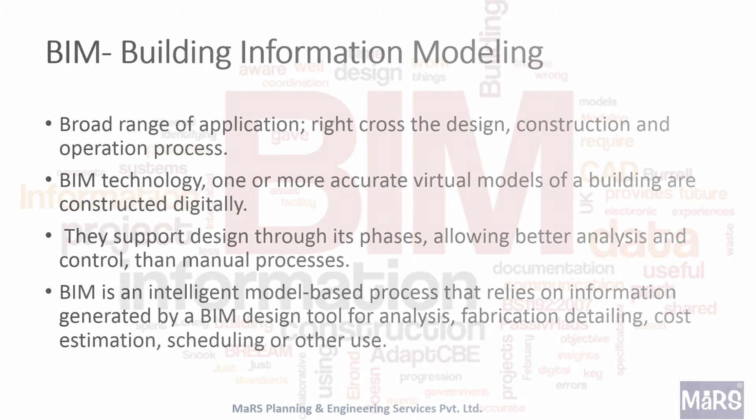MaRS BIM and other services. MaRS Group has been working in sectors like buildings and industries, water and wastewater, roads and transport, urban and regional planning, material testing and investigation. We provide services like survey and soil investigation, architectural and structural design, tendering and third-party inspection, construction supervision consultancy, project management consultancy, material inspection.

In year 2012, we came up with the idea of BIM, Building Information Modeling, and developed a separate department for BIM services. In BIM we offer services like 3D modeling support, coordinated construction support, facility management, BIM implementation and 4D simulation services.

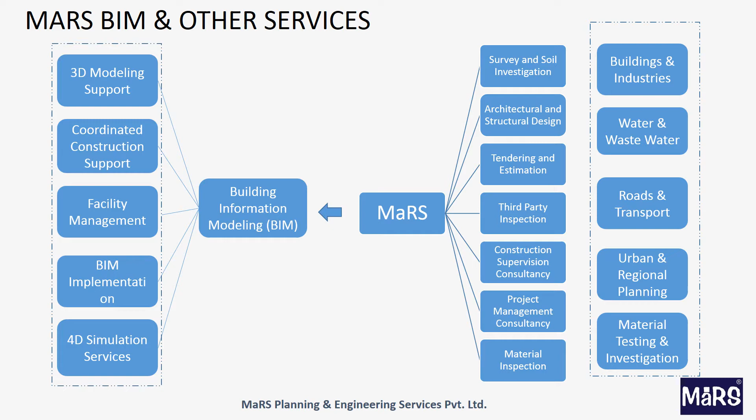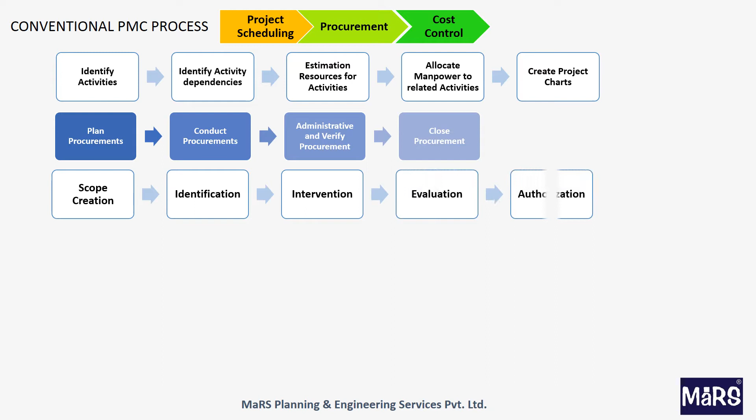Conventional PMC process: project management is a continuous process which needs to be efficiently carried out to achieve optimum use of cost, time and resources. There are 6 verticals of project management which start with project scheduling, procurement, cost control, document management, field management and data collection.

Depending on speculated life cycle of the project, budget and availability of resources, a master schedule of the project is prepared. It is important to specify milestones in project execution along with the tasks involved. All tasks have flow of work and interdependencies with specific quantum of time and resources noted in the master schedule. Such master schedules need to be updated daily to manage project activities.

It gives early alarms for delays, procurement, etc. Timely procurements need to be carried out knowing the time to delivery. The master schedule is rechecked for its correctness.

Quality assurance and quality control are two major supports of the project, fixed up time to time throughout the project duration. It ensures safety and quality of a project.

Along with QA and QC, it is essential to maintain field records like cement register, steel register, labor record book, etc. Maintained data with results and reports need to be shared with the client to make them aware of the project management affairs.

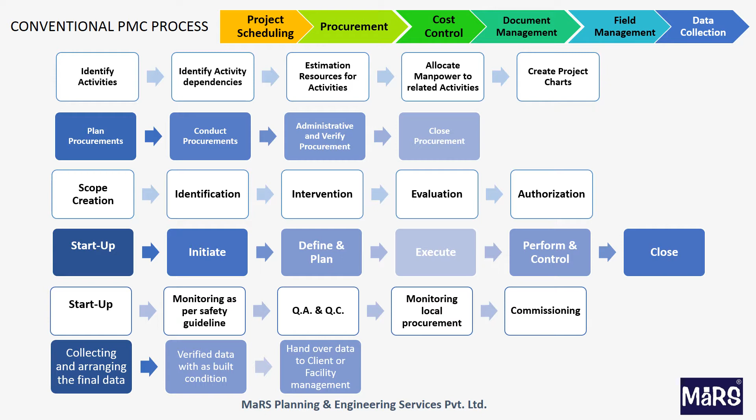BIM-based PMC process: virtual design construction. In this process, first we receive all the 90% design data from the consultant or client. Then we start the basic modeling in reference to the received data. This process is similar to virtual construction.

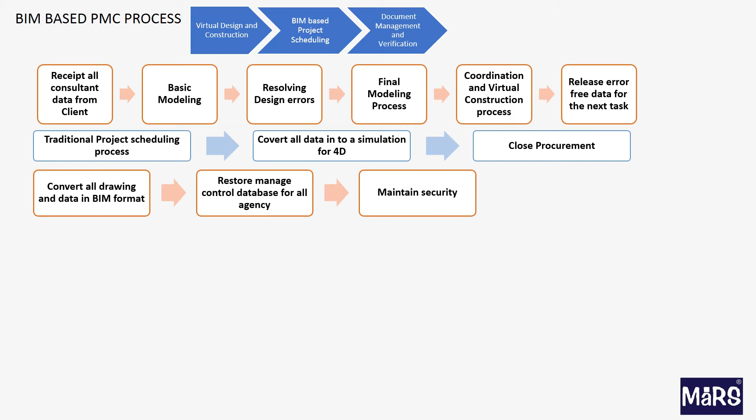At the same time, we find the design errors and conflicts. With the help of the consultant team, we sort it out. After this process, our construction data becomes more specific and accurate. Based on this data, we start the virtual construction process.

BIM-based project scheduling. For this task, our initial process is the same as the traditional project planning stage. We revise our model as per the project plan. The model can assign the phases of construction, which is helpful to us in 4D modeling.

After the completion of this process, the planner is able to prepare a 4D model, which will be ready for on-site weekly updates. This 4D model can compare actual versus planned progress.

Document management and verification. For better document management, we update all the data in one format. So all data will be available in a single model, and this data is placed on a cloud-based server. This facility can be managed for easy accessibility, security, and improved review cycle.

So all appointed agencies can review their requirements. The verification process will improve, and the execution team will get final and accurate data.

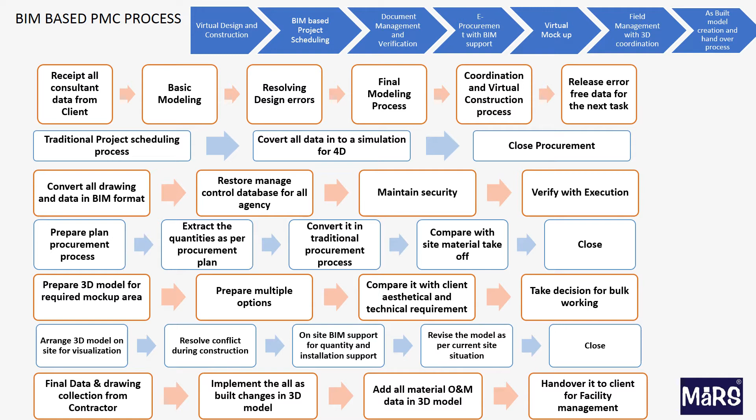Also, they can find the revised quantities and remaining changes in the further process. This way, the design and PMC team will get final and accurate as-built drawings from the model.

As-built model creation and handover process. This task is very important for the building life cycle. The team collects all the as-built data from the different agencies and converts it into one single model.

This model will help in the operation and maintenance process. So this model is handed over to the client or facility management agency.

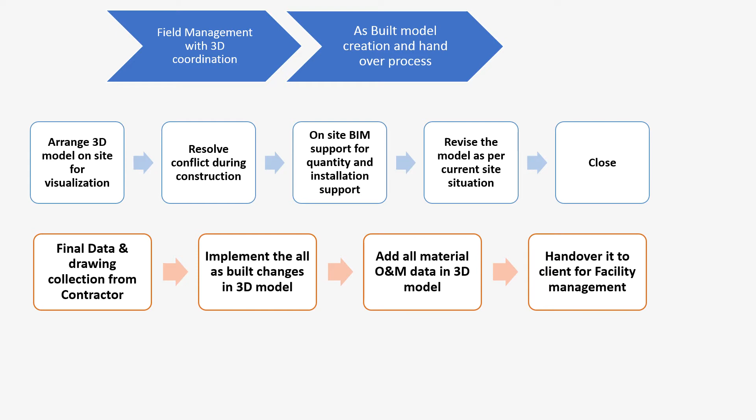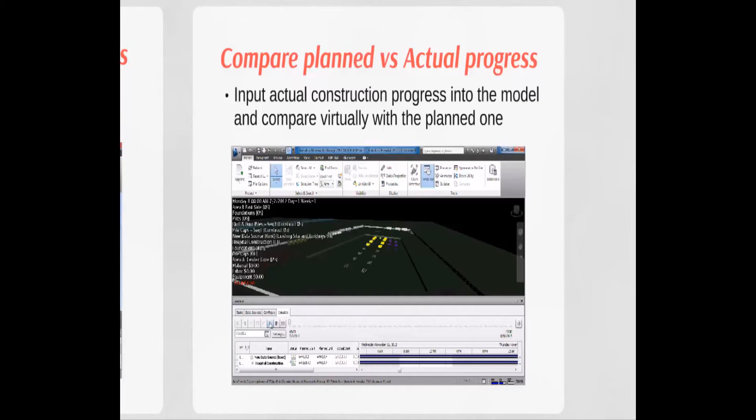Planned versus actual progress. The video shows how 4D simulation can relate actual progress and planned progress of construction, and we can manage to see the progress delays and differences.

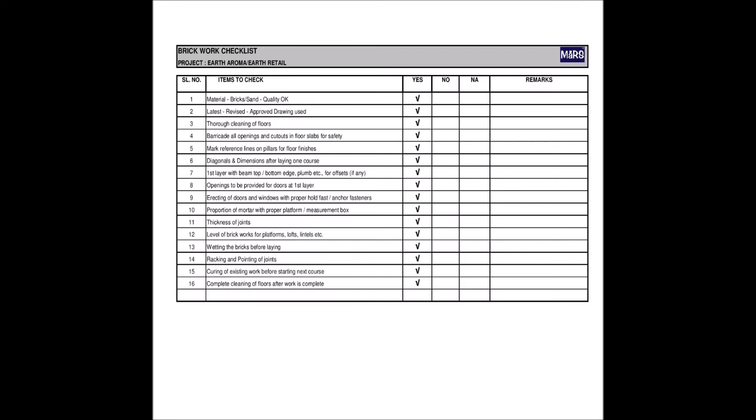Specific requirements for BIM-based PMC: we require 90% design data, 90% project requirement time, and budgetary data is also required for BIM-based PMC. The requirement of site-based BIM support and cloud-based data management is also mandatory.

Good for construction drawings, technical specifications and quantity takeoffs are done and released from the 3D model. This data is shared with the contractor for on-site working.

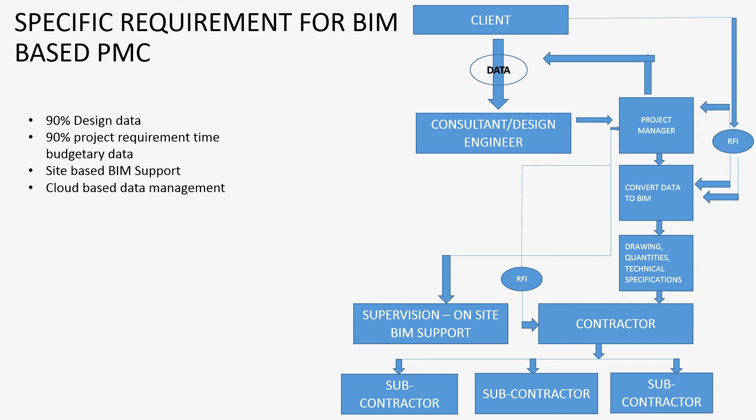Benefits: the basic benefits of BIM are a collaborative work environment with a single and common place to collect, store, share and manage the model; faster project delivery; reduced cost due to consistent data capture and reporting; reduced risk with tools to identify and resolve issues; increased transparency and visibility across stakeholders; and easy client handover at the end of the project.

Virtual design and construction phase benefits are: raised accuracy in design, minimized design revisions, minimized design-based delay in design approval, and improved approval cycle.

BIM-based project scheduling benefits are: 3-dimensional visualization in project scheduling, managing multiple sites from a single location at one time, easy and fast actual versus planning comparison, resolving conflict between tasks, avoiding delay, and document management and verification. Benefits also include improved review and approval cycle, easy data sharing, minimized paperwork, quick data availability, secure database, and good backup options.

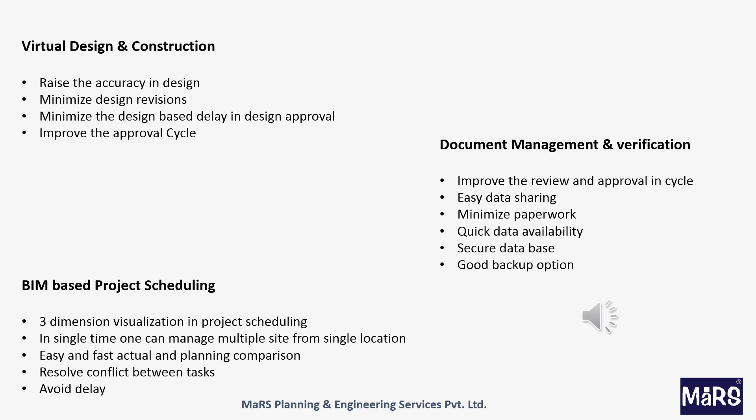E-procurement with BIM support benefits are cost saving in material takeoff, construction phase quantity takeoff, improved transparency in procurement, and minimized rework.

Virtual mock-up benefits are minimized time in mock-up preparation, minimized cost for mock-ups, multiple option availability, and instant solutions for technical and aesthetic-related queries.

Field management with 3D coordination benefits are minimized rework on site, time saving in the drawing review cycle, avoiding delay for coordination matters, and improved building life cycle maintenance point of view.

As-built model creation and handover benefits are raised accuracy of as-built data, 3D visualization for maintenance, improved building life cycle, and easy maintenance.

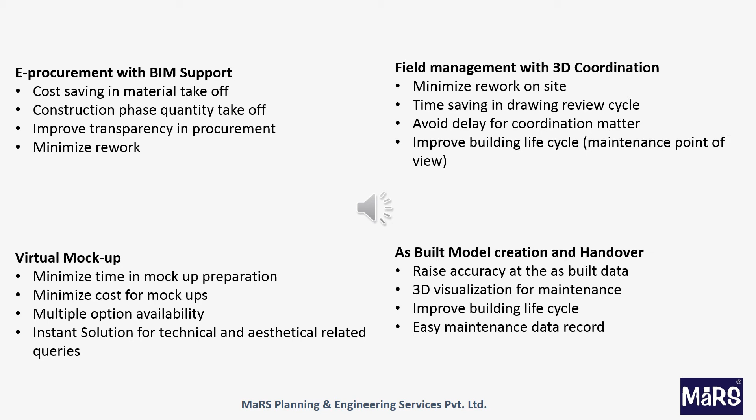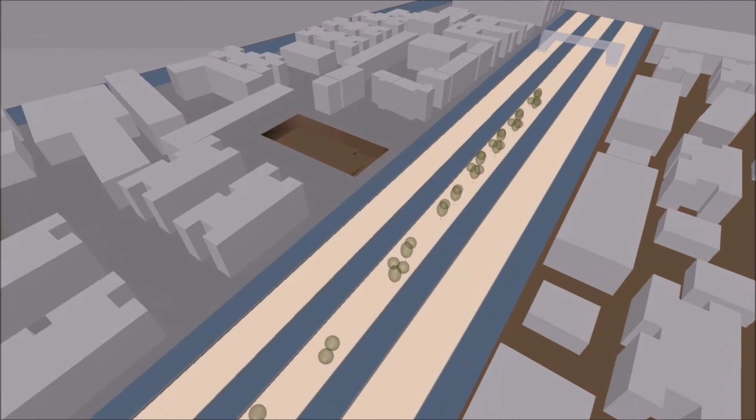Case study: this video is a simulation of one of our projects in Mexico. This is a residential apartment in Mexico which we worked on using the BIM platform, and the video is a 4D simulation of the project. This 4D simulation shows the construction sequence as per the project planning.

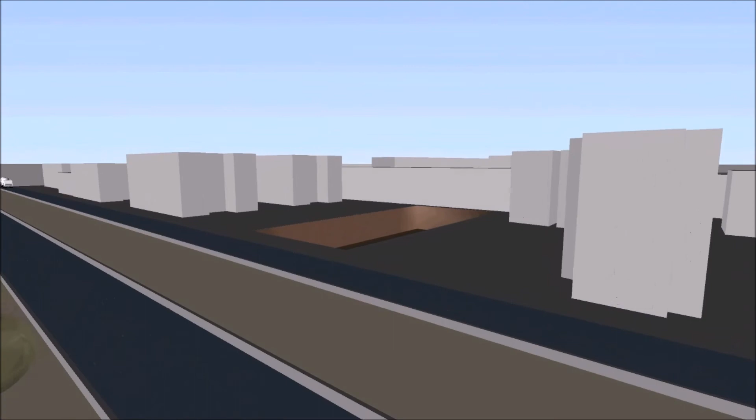This is a 360 view of the project showing the architectural services as well as other services, south view. The simulation illustrates how the conventional drawings are modeled in Revit software, and BIM-based detailed drawings are the outcome of it.

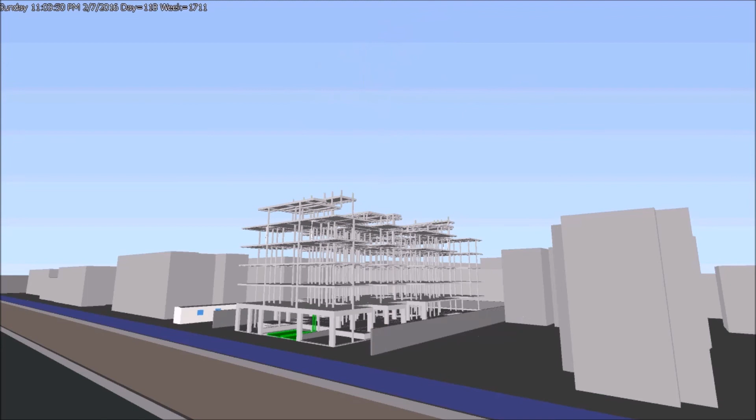Conventional drawings are the input drawings which we receive from the client or consultant. The BIM-based drawings are the outcome of that data, which are detailed and described as good-for-construction drawings. This virtual construction model allows a built-in quantity takeoff feature which allows us to effortlessly generate quantity takeoffs without the hassles of on-site quantity surveying.

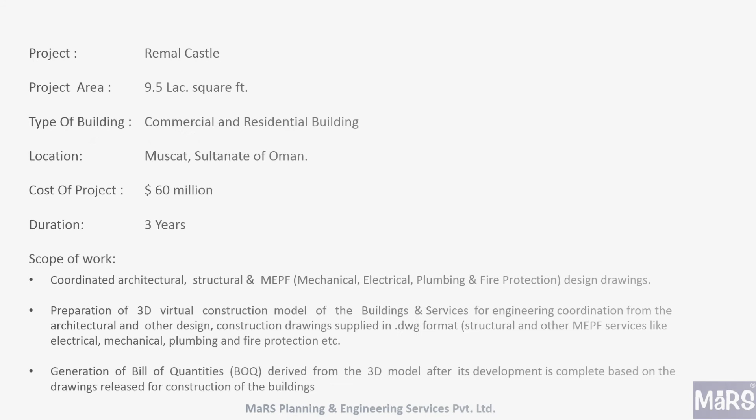The project shown here is a commercial and residential building in Muscat, Sultanate of Oman. The project scope of work and images are shown here.

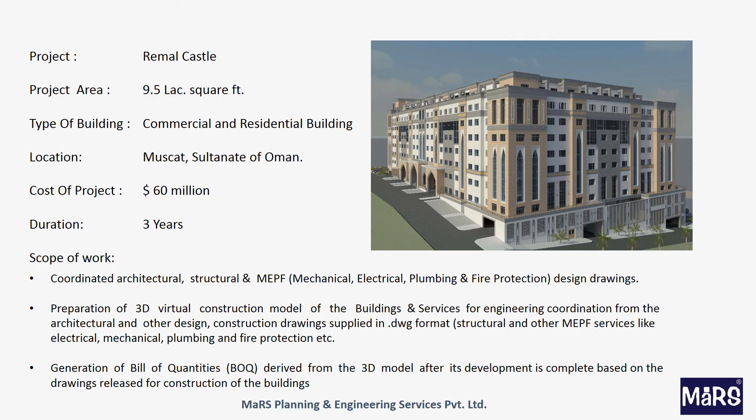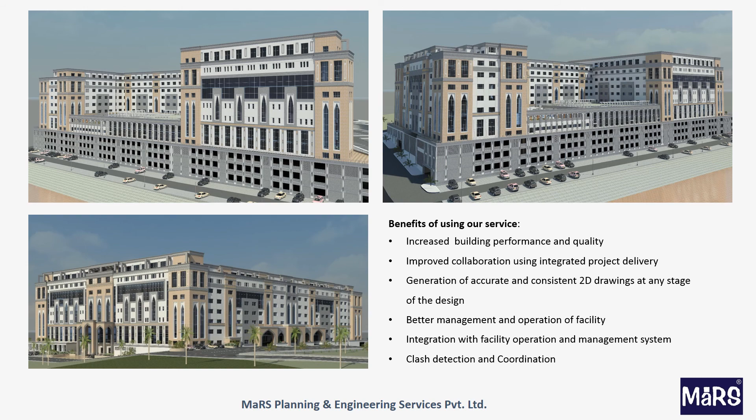Benefits of using our service: increased building performance and quality, improved collaboration using integrated project delivery, generation of accurate and consistent 2D drawings at any stage of the design, better management and operation of facility, integration with facility operation and management system, and clash detection and coordination.